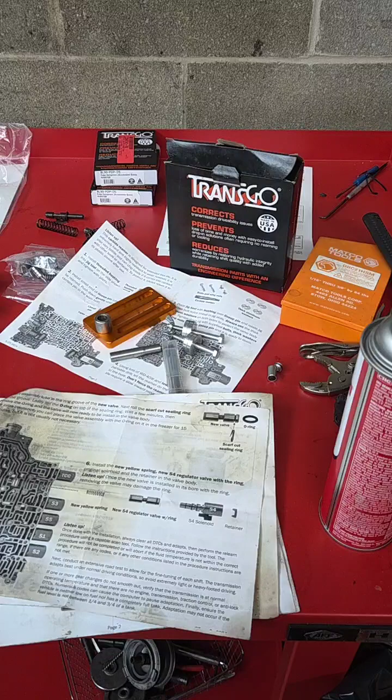I can honestly say that I've been working really hard at figuring out my 8L90 problems, guys. I've tried a few things and I'm going to show you what worked for me.

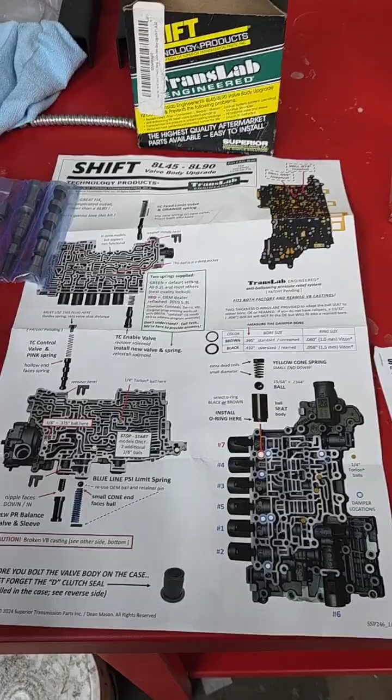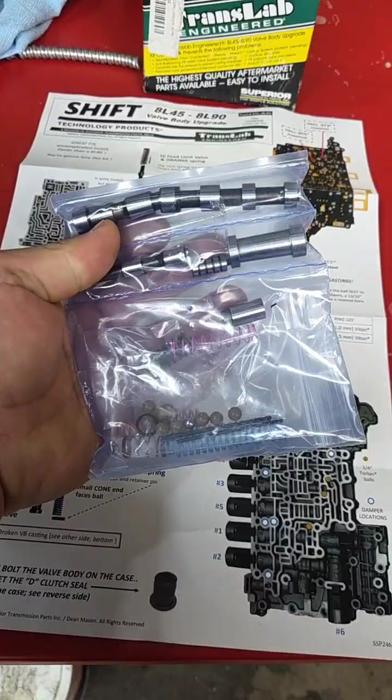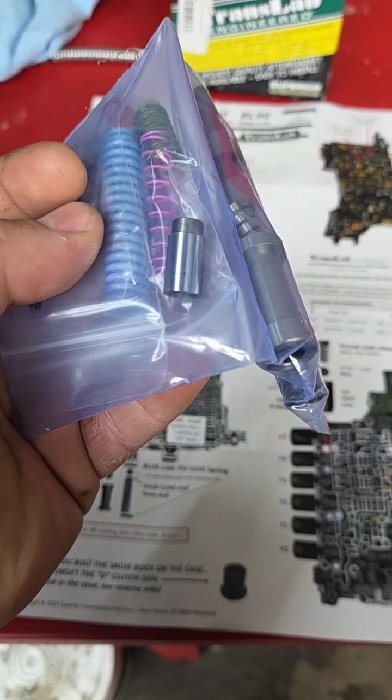Okay, so originally when I started building these transmissions aftermarket, I always used this kit here, the Superior kit. I always felt like it came with a lot of stuff that we could put in the valve bodies. I felt like it worked really well until it didn't. And I also found that it comes with one pulse damper, and that was a problem. The way that this pulse damper seals, it actually doesn't seal off the cavity for that.

And this transmission that I just built, I started with the Superior kit, and that's where all my problems actually started. After I installed that Superior kit, the transmission left, and it drove fine the whole time I drove it. The customer lived over an hour away, and every time they got home, it would basically fall out of gear going from second to first. It still had a torque converter shudder after it got warm.

And that was kind of where all my problems began, because that was the only kit that I knew of. I didn't know of any of the other tools or anything that was available for these transmissions aftermarket. I was a dealer tech, and we always replaced these valve bodies. And when I started doing these, all of this was still relatively new, so I didn't know that there was support for this stuff.

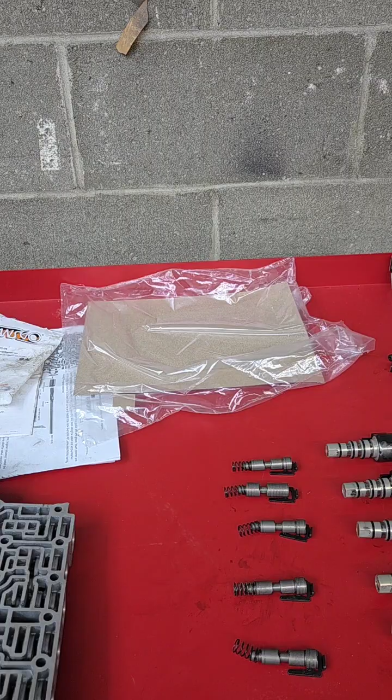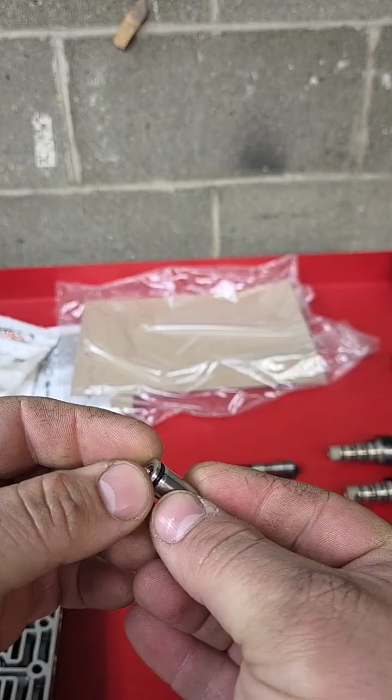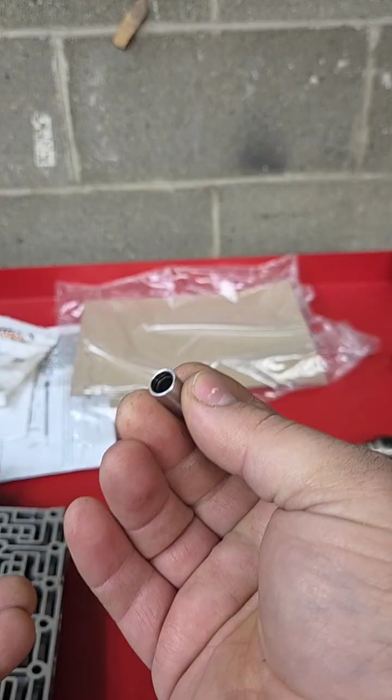So after some soul searching, some information diving and reaching out to a couple of people, I was pointed in the direction of this Sonnax pulse damper kit here. Essentially it's just a sleeve that you put down in the hole, and there's also another pulse damper inside of it. Then there's a spring that goes in here, and then you have this little cap that goes on the top here like this.

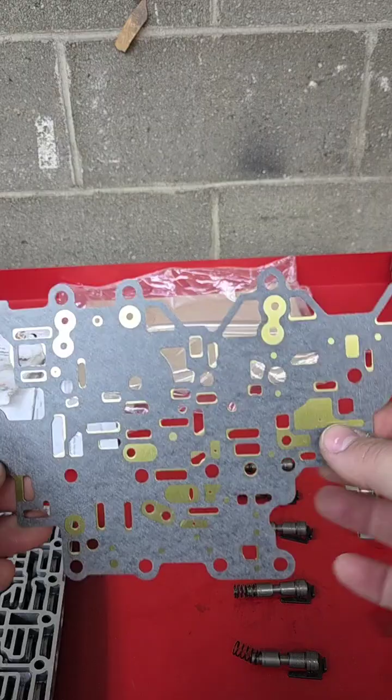Now, when I first put this kit in there, I thought that this was going to fix everything. The truck wasn't even gone for a couple of days before we had issues again. And I found another problem that this caused that I really was not happy about. In this transmission, on top of the pulse dampers, you have this pulse damper plate here. This kit actually destroyed this pulse damper plate.

Right here is where the top of this little pulse damper will ride so it can seal, and these holes were getting destroyed. I didn't like that kit for that reason. I ended up having to replace this plate, and I decided to go a different route with the pulse dampers on this transmission because I still had an issue, and I felt like it was still a pulse damper issue. So I'm going to show you what I tried next.

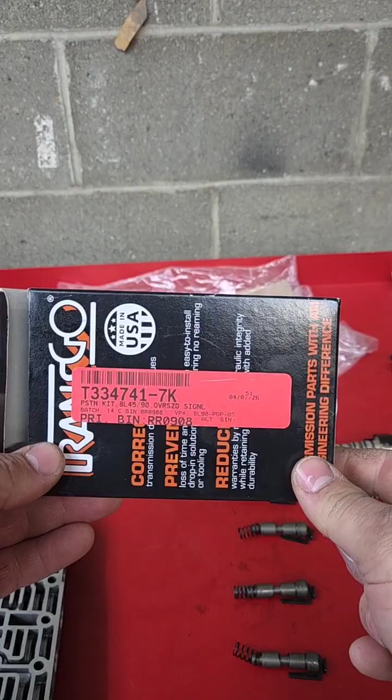Okay, so then researching on Transgo's website, they have an oversized pulse damper kit here. It's designed a lot like the original ones, but they're bigger. Obviously you're going to have to ream it out. There is a special tool that is needed to put these in, and I'm going to show that to you right now.

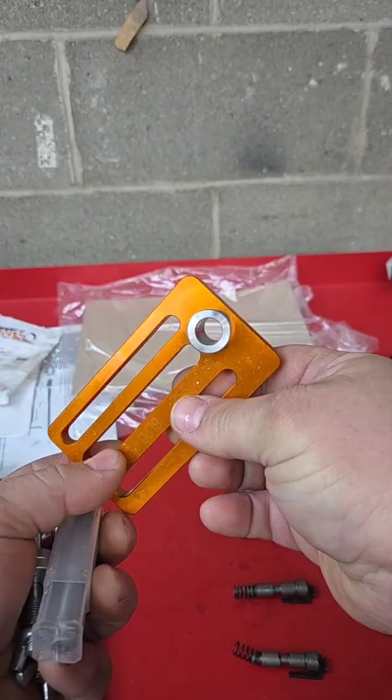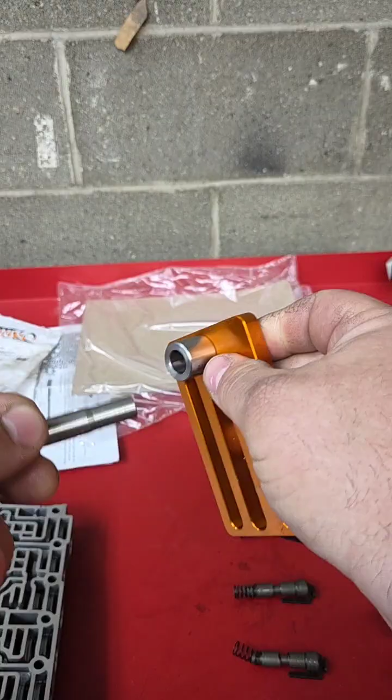Okay, so here's the part number for the pulse damper tool kit that you have to use for these. It's a great kit, really easy to use. I was kind of nervous at first. It comes with this little jig that you bolt to the valve body with your alignment tool here. This is also a good tool to test whether your holes are worn out. So this just goes in there, and then you bolt it down with these.

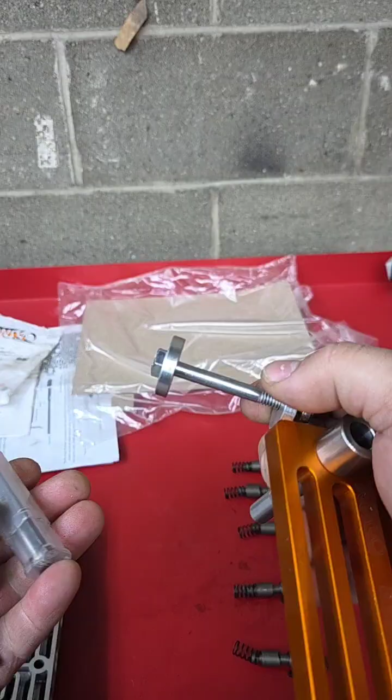You've got two of these with the aluminum spacers, so you don't damage the valve body. And it also comes with a reamer. This is a really easy kit to use. Once I got everything together, it actually sort of fixed my problem, but also didn't fix my problem. So let me explain that. Okay, so after I put in the second pulse damper kit, it seemed like everything was fixed.

I took it on several test drives. I didn't have any issues. Customer took it home, got it nice and hot. The next day, I got an angry email that their truck still isn't fixed.

And basically what was happening was, so the torque converter shudder was gone, but when you would come to a stop, the truck would fall out of gear and then it would slam like you're being rear-ended. And now it was taking a lot longer for that to happen. So it was sort of fixed, but not quite fixed.

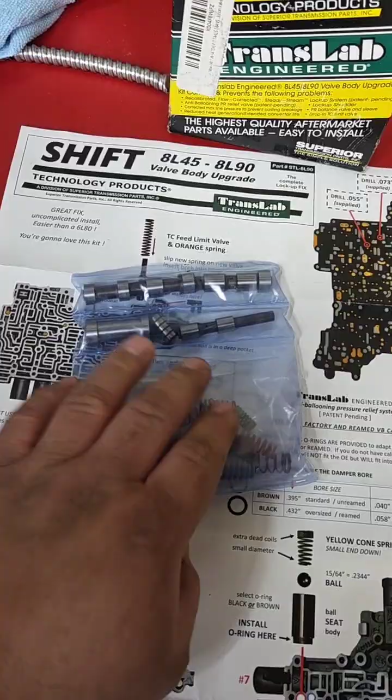So obviously we had to do some more research and test driving. And I found some more stuff that I feel like was better than the Superior kit. So here is everything the Superior kit comes with. It's got some springs and a couple of valves and stuff.

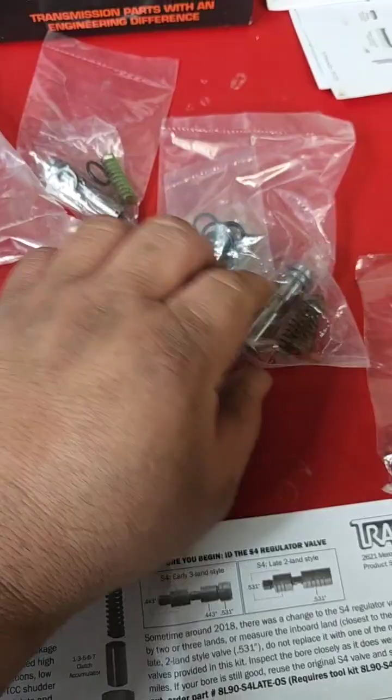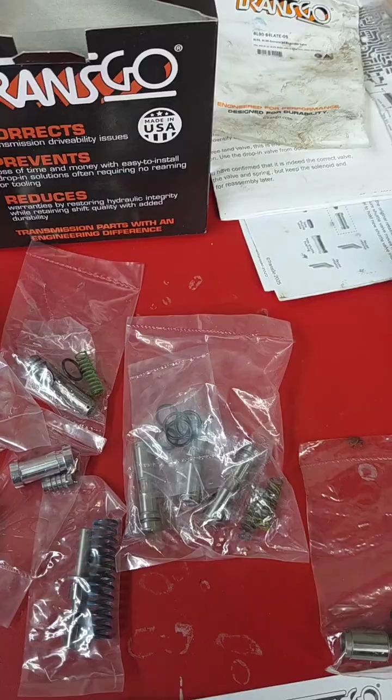But then I found the Transgo kit. The Transgo kit comes with a whole lot more stuff. It comes with all the shift valves and everything. And these are kind of interesting because you have to put a scarf cut ring on them and freeze them. So that's pretty promising.

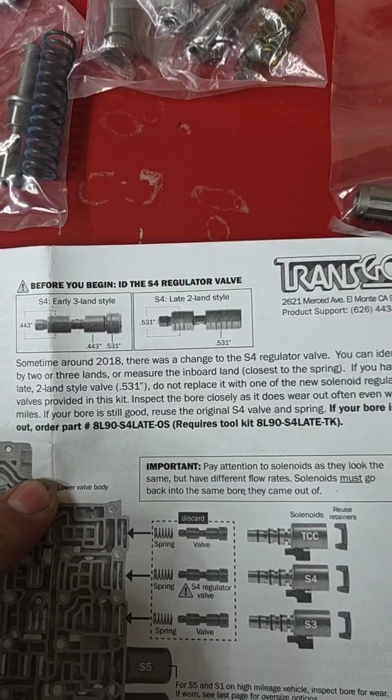But also in this kit, in the instructions, if you have the late style S4 valve here, you actually have to buy another part. So there's another kit for the late style S4 valve. Also, you have to buy another reamer. So this is for the 8L90 S4 late valve because we have to ream that hole out. And it says here that they've seen that valve wear out in lower mile units as well. So that was something that kind of caught my eye.

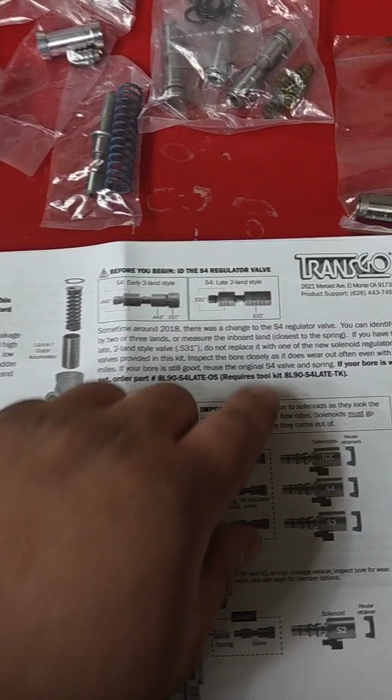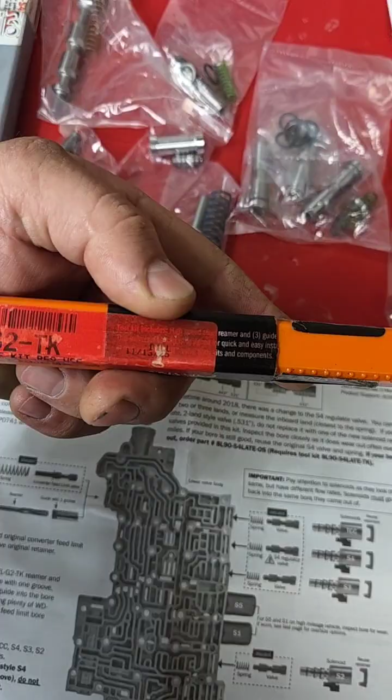And looking at some of my hydraulic circuits and stuff, I felt like I had an issue with the S4 circuit. So I bought this kit. You also are going to have the AFL G2TK reamer for some of the valves in this kit right here. It's a pretty versatile tool. You can use it for a lot of other transmissions. I originally bought it for a 6T75 that I did. And these tools are like really easy to use. They come with guides and everything.

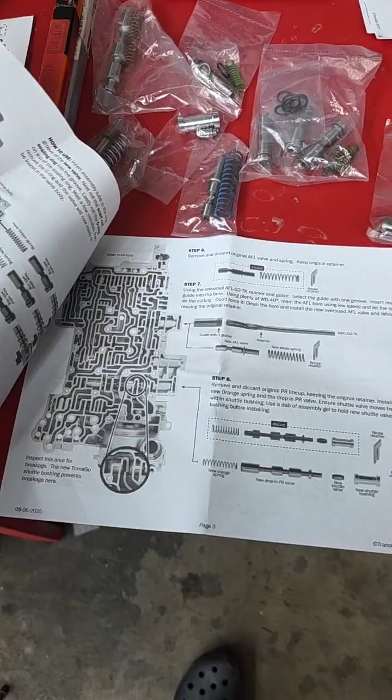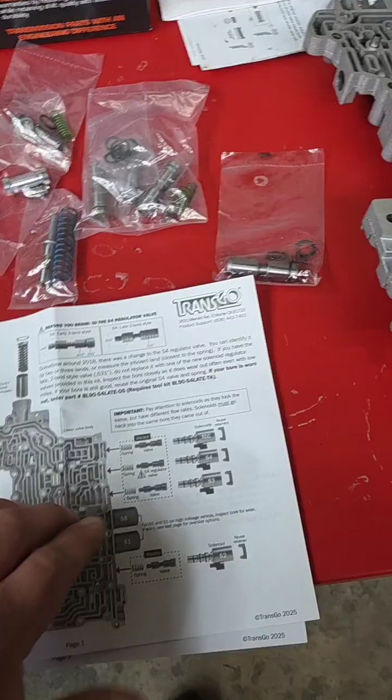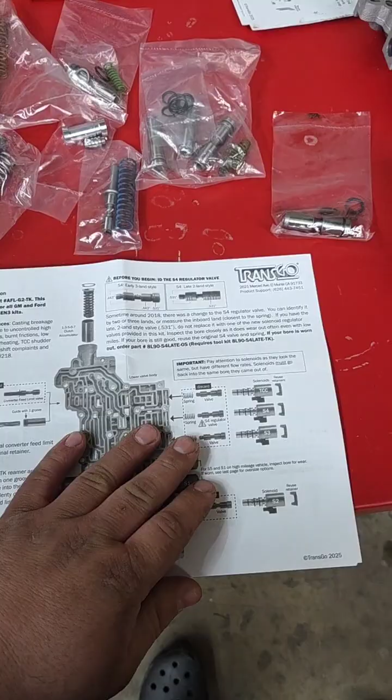And after I got this kit put in, we drove it for 2 hours and I never had any issues out of it. But I was kind of feeling like we had a heat issue. So once the transmission was cold, it would shift fine. And then once it warmed up, everything expanded. I was losing fluid pressure somewhere. And I'm pretty sure the S4 valve circuit is where I was having my issue. But we reamed out the S4 pulse damper, and it improved the problem, but did not fix it completely. So that was kind of the fight that I was fighting with this transmission.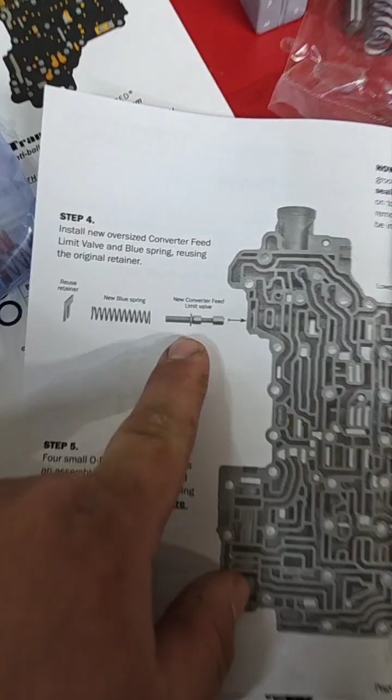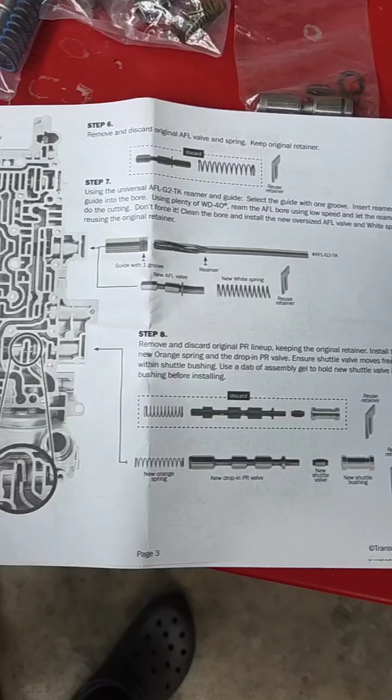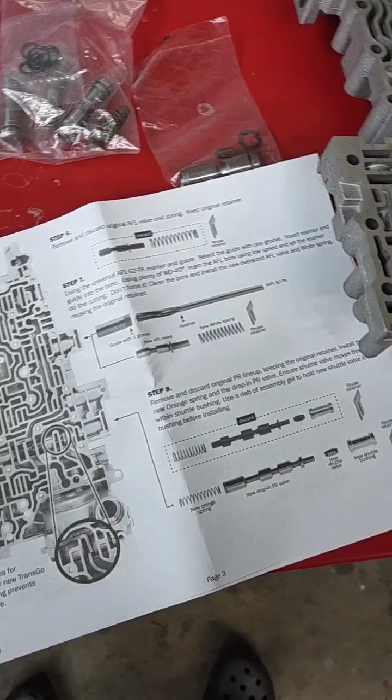Another thing that I liked about the Transgo kit over the Superior kit is they actually have you ream out the converter feed limit valve and the AFL valve. So you're going to be reaming those holes out and putting oversized valves in them. And that's kind of just something on all of the GM transmissions that pretty much goes bad. And sometimes putting a redesigned valve in there is not going to fix the issue. You have to ream the hole out to fix it. And if any of you guys have any experience with the 4L60 transmissions, you understand what I'm talking about here.

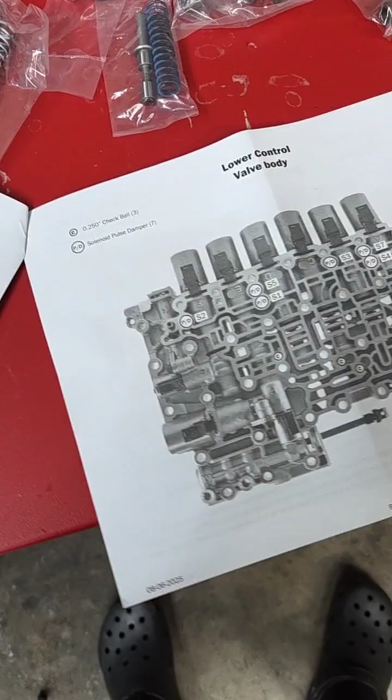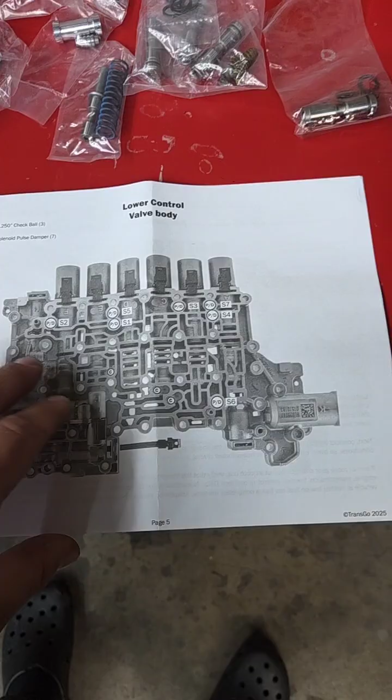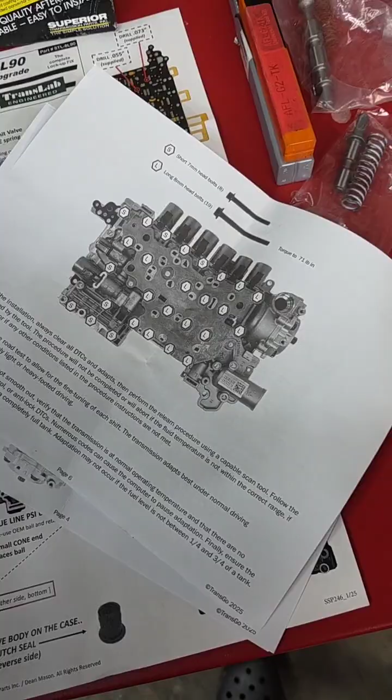Another thing about the Transgo stuff that I love is that they come with a lot of really good information. They label everything, the instructions are clear, and it comes in the package, whereas with the Sonnax stuff, you have to go on the website and look everything up. So this is something that I like over the Sonnax stuff. There's a lot of really good information. They give you torque specs. There's just a lot of good stuff in the Transgo parts here.

Now, for a long time, I've always been a Superior parts guy. It's just this was what was quick and available. I didn't have to piece things together. I would like to try the Sonnax parts on these valve bodies, and I'm probably going to do that next. But for now, the Transgo kits are where I'm going to go until proven otherwise, unless I find something better.

But I like this Transgo shift kit here that we got. It is an SK 8L90 right there. And it seems to cover all of the bases in this transmission. I'm not going to be using the Superior kits anymore because I didn't realize how inferior they were. So that's my take on it.